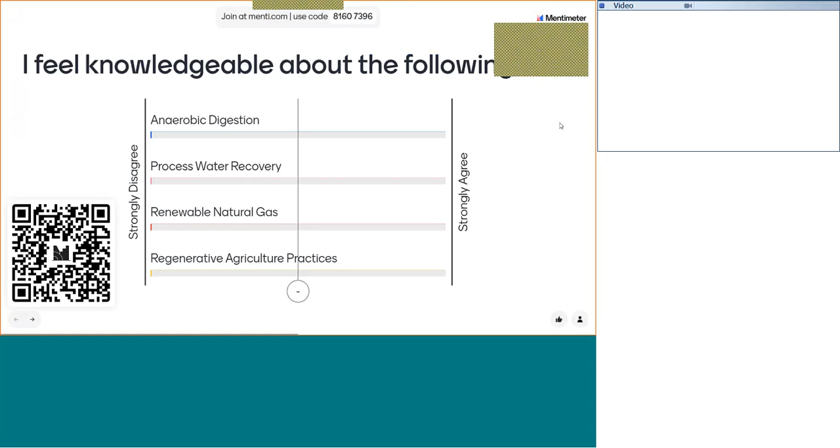But if you guys wouldn't mind pulling that up, we are going to ask the same question for four different topics. So basically, 'I feel knowledgeable about the following topics,' and that first one is anaerobic digestion. Process water recovery is the second one, renewable natural gas, and then to finish out, regenerative agricultural processes or practices.

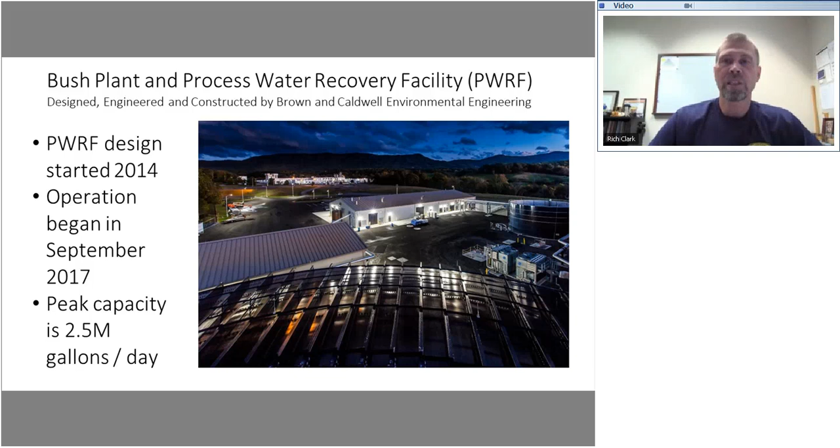You can go ahead to the next one, and then Doc's going to kind of take over. He's the one who runs this system every day, manages all of our site utilities, but this is obviously a big part of that. Between him and Jason, they're going to walk through the system and share a lot of the details that go into that. We know the focus and interest for this webinar is anaerobic digestion, but we'll give you a quick overview of the whole treatment process so you can at least see how anaerobic digestion fits into the whole system.

Probably the first thing I need to tell you is this treatment system and the waste stream is truly processed water waste. There is no human waste or sanitary waste in it. That's a completely separate stream that goes to a recirculating sand filter that we're permitted to operate and run. If you're going to try to do reuse or processed water recovery, that's a big thing to keep in mind.

So quickly going through the process, we've got the manufacturing plant, the waste stream from there, which is primarily split beans or waste beans. It's sauce, it's brine water, it's cleaning water. Gravity flows to a wet well. We pump from the wet well through stationary screens to separate the solids and the liquids, or the beans from the liquid. The beans go into a dump truck.

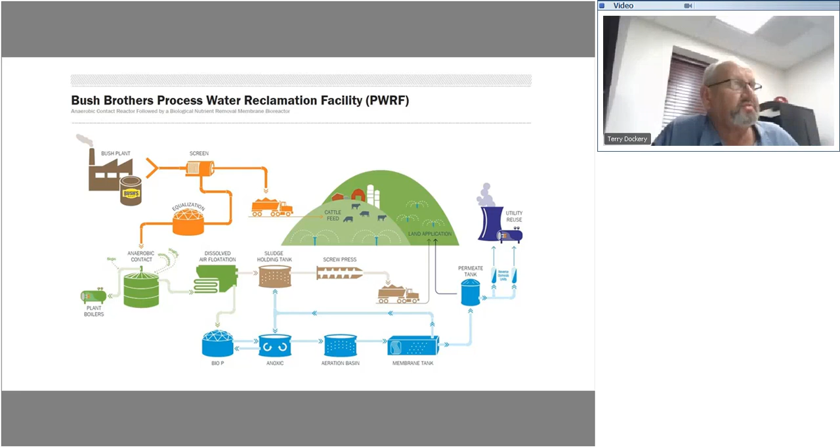I think the next one, we have a picture of equalization tanks. I've kind of already described those. They're low maintenance. You just basically got the mixers.

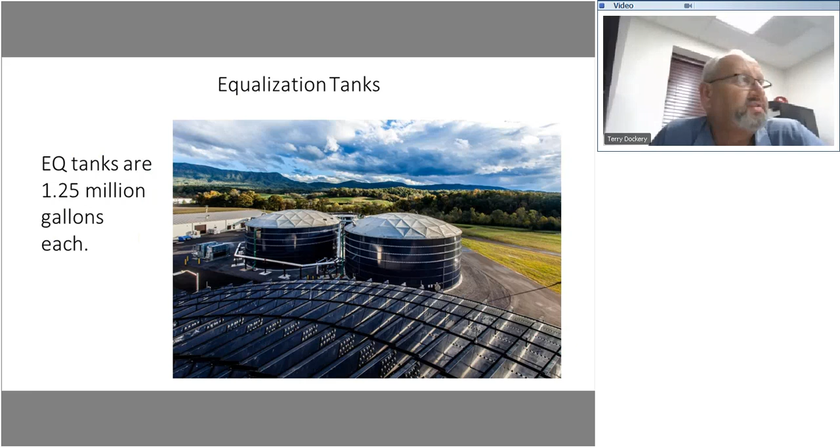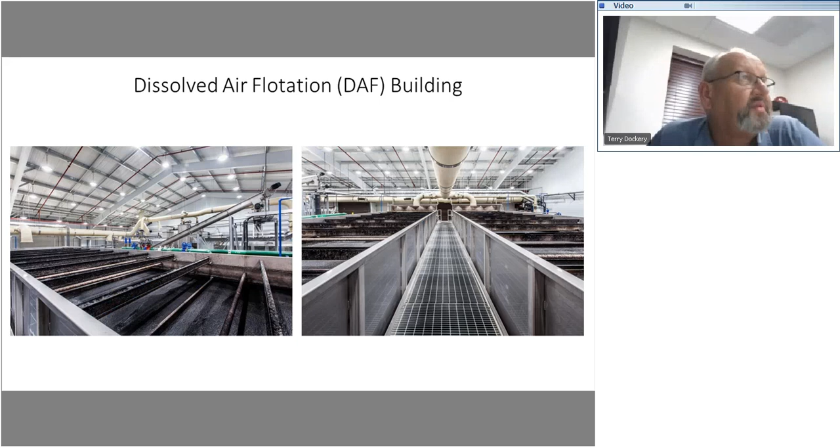But the sludge from this thing overflows as well and goes to the sludge holding tank. Membrane bioreactor, or MBR, there are 15 cartridges.

So there's 3 sections with 5 cartridges in each section. And if you go as far as filter size, if you go to Lowe's or Home Depot and purchase a whole home filter, the smallest you'll find would probably be about 10 micron, and this is a 0.03 micron, and it will take out some forms or strains of bacteria and viruses.

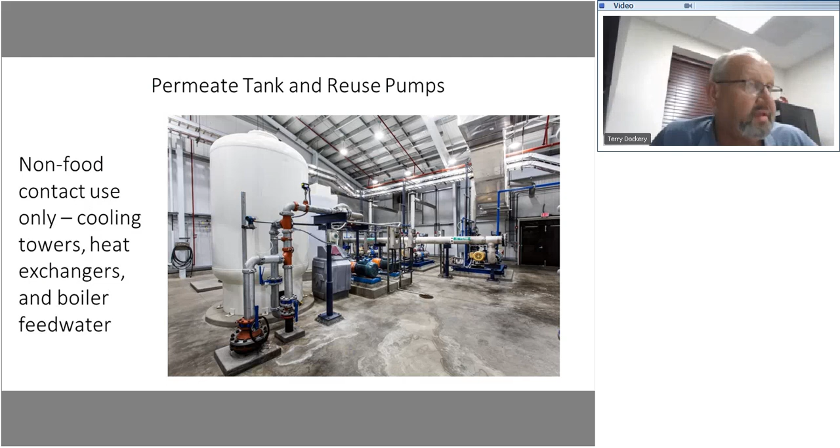Next, we have our biogas. Sorry, that's yours, Jason. I might have done. Go ahead, Jason. No problem.

Jason Mullen, Brown & Caldwell. Brown & Caldwell designs some of the largest municipal plants in the country, but I work on just private sector stuff in industrial wastewater. So I'm exclusively industrial wastewater. Been working for Bush for over 10 years. We designed a system starting with a treatability study done in our Nashville lab.

Hold on, here I am. We can test a small system in our lab. We started that back with Bush, probably 2012, looking at what it takes to treat the water, and we got to the system we have.

As Doc says, the compression is a big part of it, because in their previous system, they always had gas going to the boilers, and so we wanted to maintain that. So this system still has the gas going to the boilers. We have to now compress it more and pump it farther, because the PWRF is separated from the production facility by a new highway. So we actually have the wastewater plant on one side of the highway, so we're compressing it underground and over to the new plant.

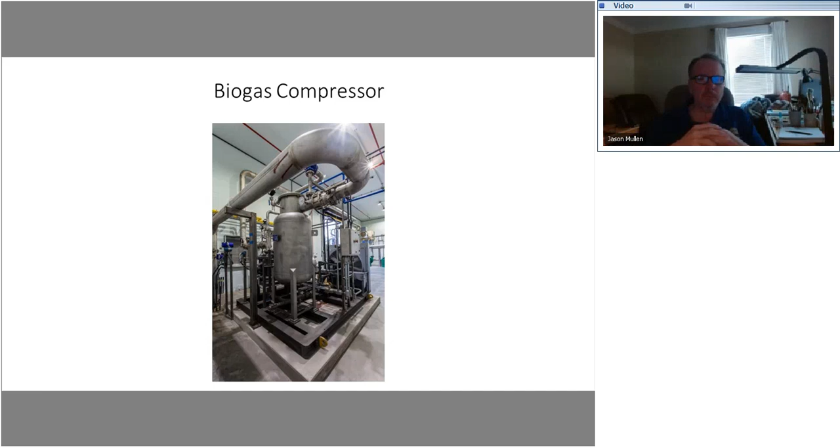Jason, I got carried away and went right through the ACTs, and that was your slide. Why don't you, and this is the topic, say anything you want to say about the anaerobic digestion? Yeah, sure. Caleb, would you back up, please? One more there, a couple more.

Yeah, there you go. The ACT tanks, the anaerobic contact tanks, they're completely stirred tanks. There's just jet mixers in there. There's nothing else in there. And they're very large, 2.5 million gallons apiece. The reason they're so large is because, as I alluded to earlier, the waste load can vary a lot. It can almost double here within a week. And so that's the reason you've got to build it so large, to be able to handle that sustained high load.

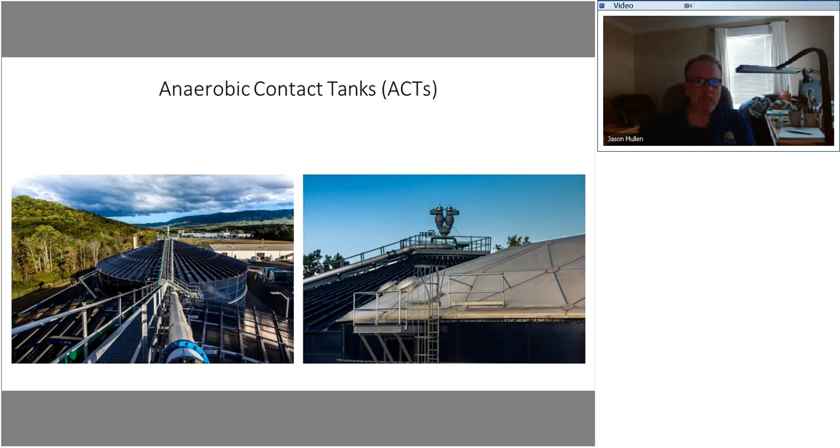The DAF, Doc went through this already. I'm just going to go through the high points. The sludge in here is very stable. These are two 600 square foot DAFs, and this is what goes to the screw presses. So at this point, the sludge is very stable. It goes right to screw presses, and you can use this sludge. And they will be using it for beneficial reuse at some point. You can make it a soil additive or fertilizer.

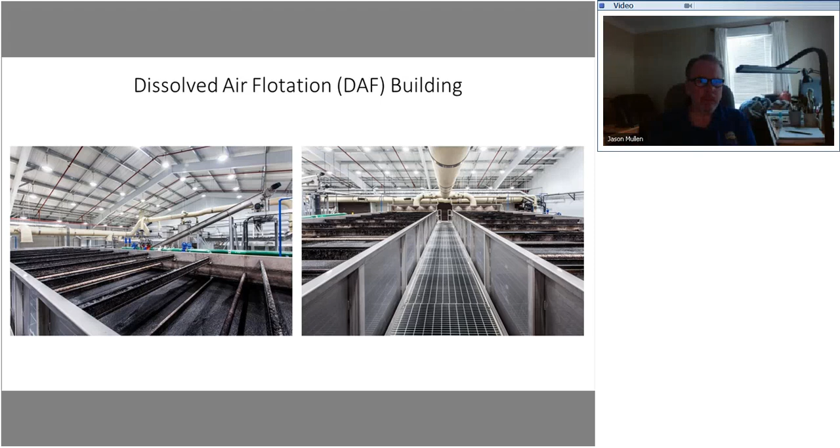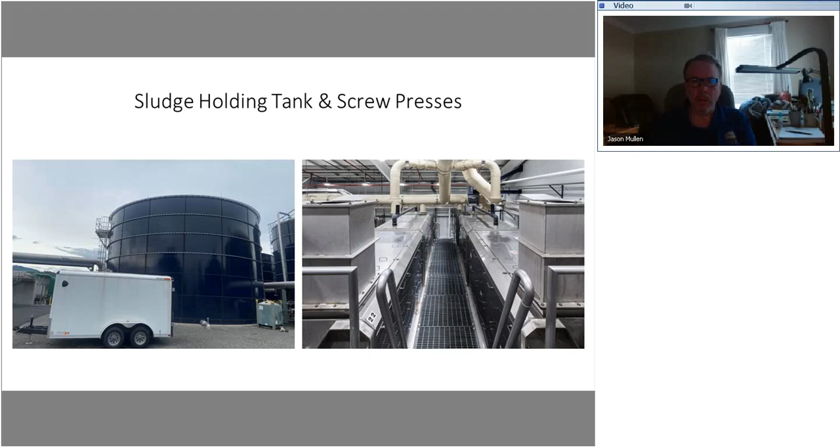Then from here, the water goes to the aerobic system. We talked about this before. On to the next one, Caleb. Bio-P tanks, this is very similar to the BNR process in municipal systems. This is where the phosphate gets removed in the Bio-P tank, and the extra nitrate gets removed in an anoxic tank.

So this is great to point out all the nitrates you're making, all the Bio-P you're making. This is an important step before the MBR to fully polish the water. We worked with TDEC for several years before we built the plant to get it as clean as we can, so that when we spray the water on the ground, it's basically clean water. The effluent coming out here is as clean as you're going to get it.

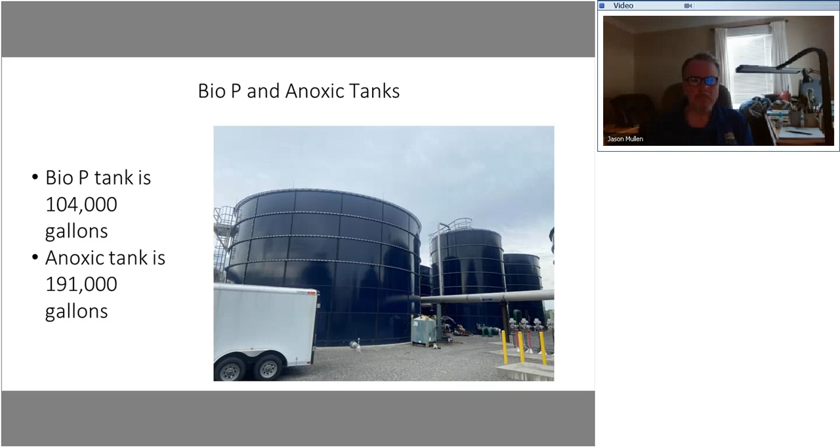Aeration tanks, nothing special here. It goes to the MBR. Again, there's two 1-million-gallon tanks. You could run with one if you had to—in other words, you can basically turn one offline and double the load in the other one. It's got a lot of redundancy built into the system.

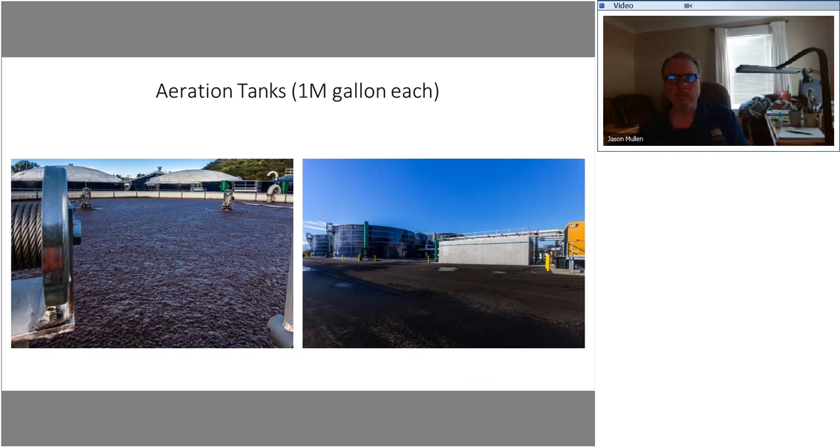So again, you see here the facility. We're standing on one of the anaerobic tanks now, looking across the highway—Highway 411 cuts between the plant and the production plant. The wastewater gets pumped from that factory in the background, under the roadway through a pipe chase, to our facility, and then our effluent pumps back over there to the same pipe chase, along with the biogas. So if you're driving through the area from Gatlinburg to the highway to the 40, you'll see the factory on one side and the wastewater plant on the other. Luckily we knew that was going to happen when we designed it, so we designed around it.

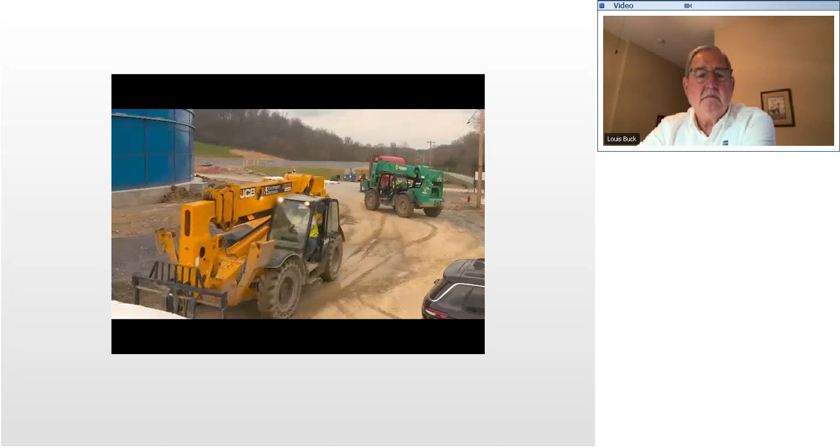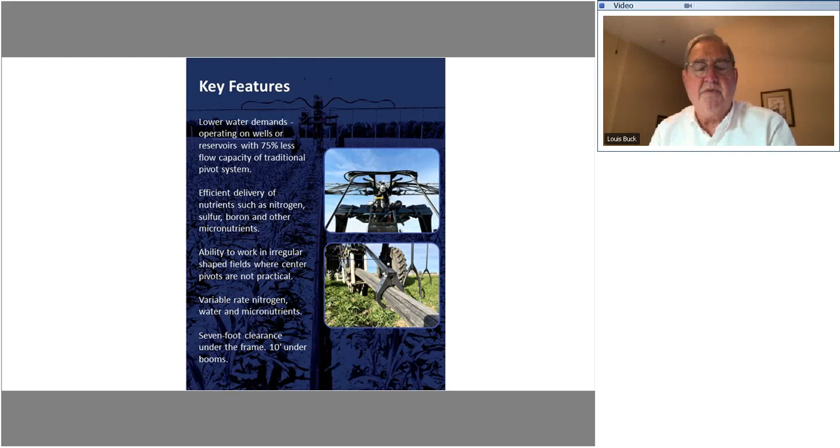We were pleased, out of 300 candidates, to be named the #1 ESG - Environment, Social, and Governance - project in North America by the IJ Global Awards last year for our Jack Daniels project. So we're proud of that recognition.

Some of the biggest renewable natural gas as well as regenerative ag projects in the world, these two, and Beam's a little bit bigger than Jack Daniels. Last slide.

So in summary, leaving a little bit of time for questions: we created a renewable energy source to allow Jack Daniels to grow. They had about 30 to 35 days where they didn't have enough gas, and they curtailed operations in the Lynchburg area. They had a choice of firing their boilers or their neighbors getting cold. There literally was not enough natural gas in the infrastructure, and that's not uncommon, more and more in Tennessee, to not have enough energy infrastructure.

It reduces carbon emissions, it improves watershed management. Again, we're processing that stillage - not all of it will go to cattle feedlots. Some of it will come to us and be put on new ground farther away than the current cattle feeding regime that TDEC knows about, and we've worked with them on.